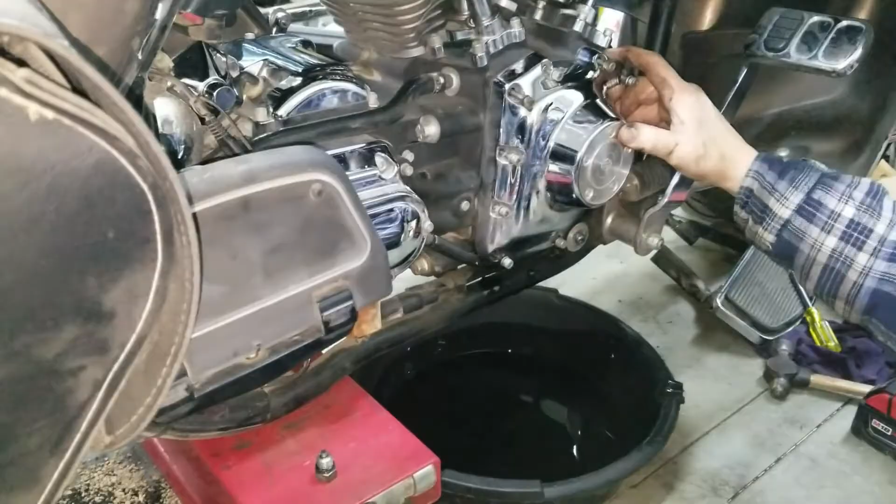We're going to be working on a 2004 Ultra, doing a Feuling cam plate upgrade in this segment. We got all the exhaust off, and he's getting ready to take the cam cover off here. It's going to start draining oil, and after this we'll be pulling the cam plate all apart.

We kind of missed this in the video with the 2007 and later model, but he's removing the push rods now. He's brought up the push rod tubes to hold them up so he can adjust them and back them all the way off, so they'll go up in there better, then take the tubes and stuff apart and pull them all out. We'll do that real quick here.

These are the quickies also. You got quickies also? Yeah, those are the quickies ones.

We got the new S&S lifters sitting in here soaking in oil, absorbing oil. We got air bubbles coming up every once in a while, you can see a couple there.

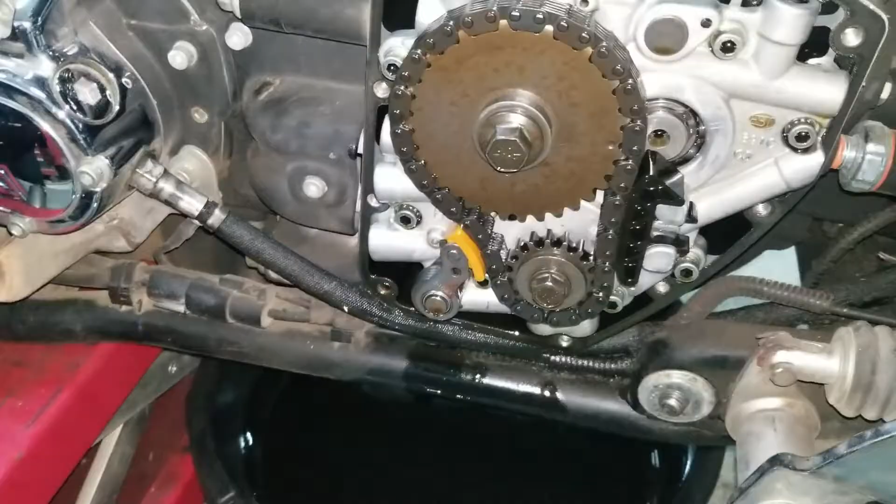Also, we got to flush the oil tank out in this bike. See, this style twin cam is the older one. These tensioners here, this plastic piece right here, they wear out about every 30,000 miles, and it's suggested that every 30,000 miles you switch them out with new ones.

So what we're going to do is flush out the oil tank, because the material that's been worn off - this is like the second or third time these have been switched out - this material's going somewhere. We're thinking it's in the bottom of the oil tank. It could be, so as a precaution we're going to flush this tank out, because it recommends to do that.

And the Feuling instructions, we're going to go put this on for this year model set. Like he said, it actually suggests and tells you to flush the oil tank out to clean out all that residue that's been building up for those years. So we're going to be doing that now, draining this out and letting it sit while we're working on everything else here in the background.

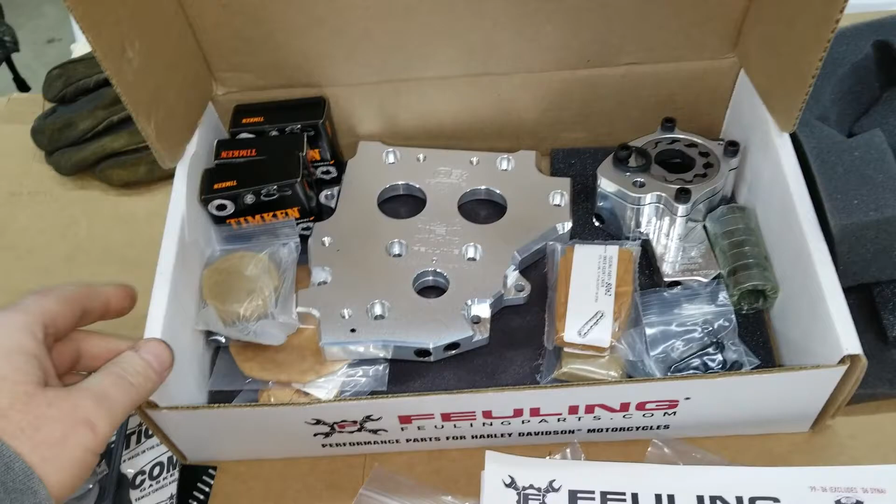It'll be draining out. The Feuling cam plate kit we're going to be installing, part number 7090. It comes with a bunch of stuff: a new cam plate, oil pump, all new bearings, a new sprocket, some chains, new screws, and lube for the prepping. It also comes with the plate for the back of the lock plate to help hold the bearings and stuff in for the plate, because this plate's different than the one in the 2007 and later that you might have seen in the other video I have out there.

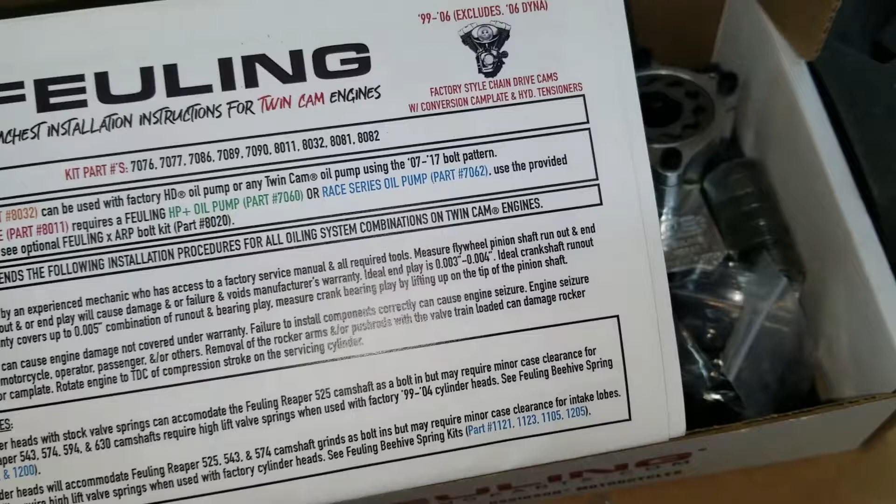It also comes with the hydraulic tensioner upgrade kit, so we're going to be going away from that spring style one that's stock. It comes with a set of gaskets for the whole thing. This is the OE Plus cam plate kit, and it's for 99 to 2006, but excludes the 2006 Dyna.

These are all twin cam engines, of course. So it's for the factory style chain drive cams with a conversion cam plate and hydraulic tensioners - that's what this is. Like I just said, this is the instructions, and we'll be going over all this.

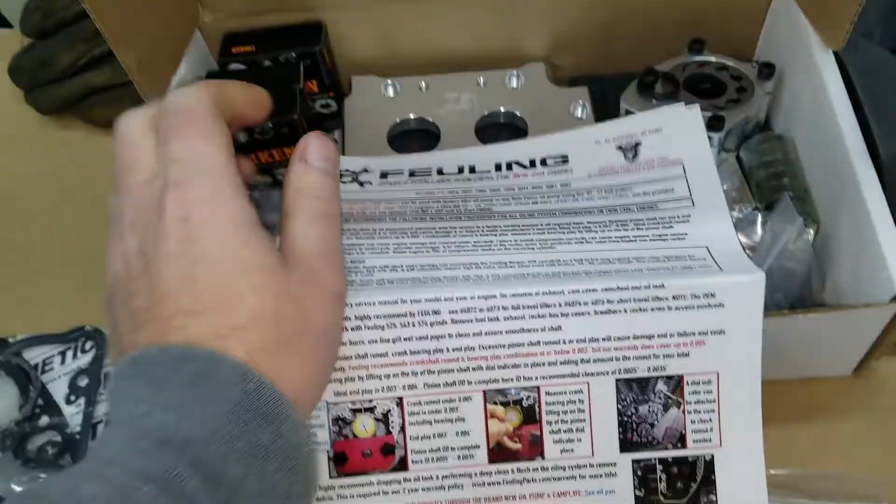So here we go. Right here we're taking tension off the tensioner and pinning it, so we can remove everything else. Dots up here - we just released that and got it pinned, and now we're backing these off and getting ready to take these out. This one's ready to come out when the timing dot is at the bottom, when they're facing each other. When this dot is up here, then the front one is ready to come out.

We're going to work on taking these all out, and then we'll probably go start taking these off later, because we're going to be replacing the lifters anyway, but that's later, putting them in and stuff.

There we are, we got the push rods out and the tops off here, and pull the lifters. We'll probably end up pulling the lifters here soon, and actually we can do that now. We have the push rods and all that stuff set aside in the order they came out, so we'll be able to put it back together easy.

We gotta take that pin out. There it is. So here we go. Then we'll be able to take the timing chain and sprockets all off, and then pull the cam plate off.

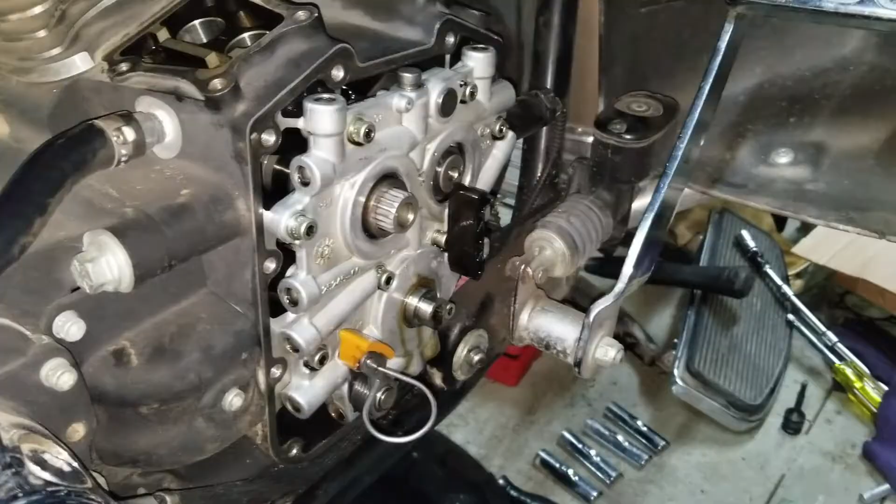There we are, now we have access to all the screws. There's a couple back here too, even. Then the oil pump - we're going to leave the oil pump on the plate, so all we're going to take off is the perimeter screws. Yeah, that's true, those are the oil pump screws.

Better release that. Guess what, that screw head - I don't want it to hit that and ruin anything. Oh yeah, I don't need it.

That should be it, yeah.

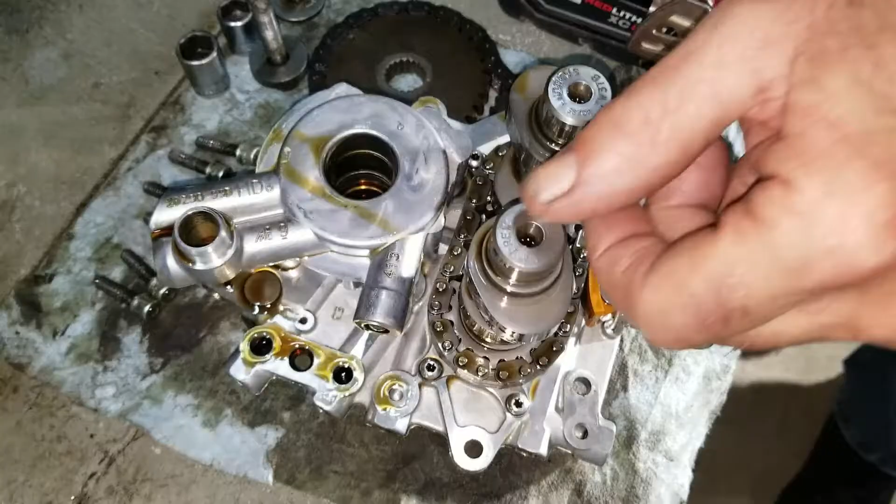All right, well here's the plate with the cams. We're going to have to remove this plate down here. And this tensioner was actually in pretty good shape - we just replaced it about 1,000 miles ago.

And these are Andrews cams, Andrews TW37B. All right, so we'll get that knocked out here quick, and then we're ready to start assembling, I think, possibly.

Removing the retaining rings. There we go.

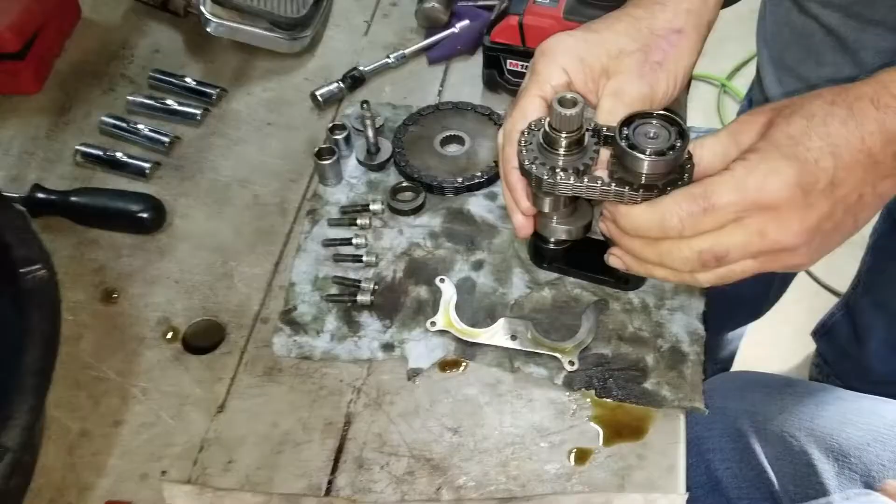Yeah, we're gonna have to tap on that first cam. I'll get a punch. Yeah, we got a new chain with the kit. Got the cams, we're gonna remove and take this out, take this off.

Now we're gonna pull the bearing off the cam. Oh, how you want to do this? I got a bearing puller.

If you watched the video on the 2007 and later, you can tell this is all different looking in here. These bearings are smaller - not quite as small as the bearing in the 99 and older Evolution motors, Shovelheads and Panheads, '58 to '99. The '58 roller bearing is just a little bit smaller diameter than this one here, and this is next size bigger. The '07s and later had a bigger bearing yet. Just wanted to point that out - we talked about it in the other video, so I thought I'd do it here too.

So while we're over here and this is all ready to go, we're gonna do the run-out test now to see where we're at with that.

So here we are - he's putting the plate on now, so we have a place to put our gauge mounted to.

Joe, your run out can be worse than mine. Really? Yeah, look at there - crank run out under 5, ideal is under 3. Well, there we go, play between 3 and 4. Oh, there we go then, I guess.

Why did mine have to be 2.5? Well, yours is better, I don't know. The year range changes that, I guess.

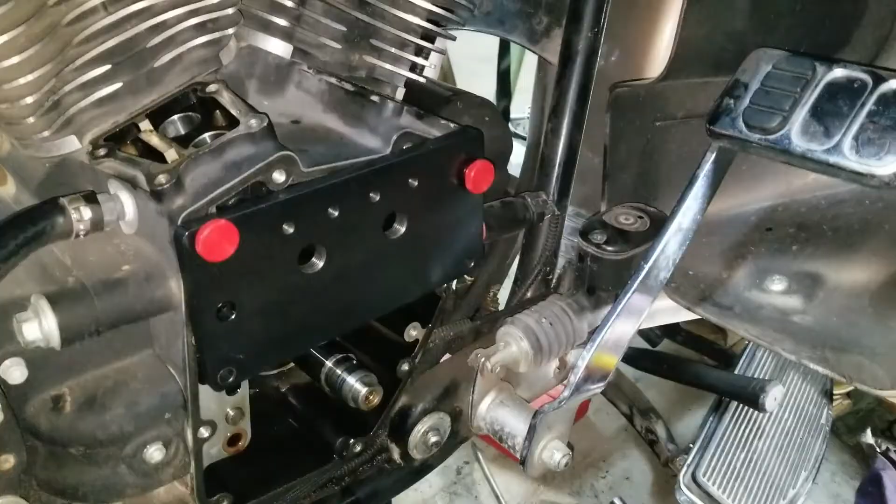I don't know, so what was it? 3 to 5. Says crank run out under 5 thousandths, ideal is under 3 thousandths. So that's what it should be.

So yeah, we're gonna be checking for any elliptical movement on the shaft here - high spots, low spots - and that would be an indication of the run out, the crankshaft halves being out of true.

We got the gauge all set up here, ready to check our run out, and he's gonna start spinning the rear wheel. It jumps up to 2 and it's back down to 0. Again, when it's on 0, tell me to stop. Keep going.

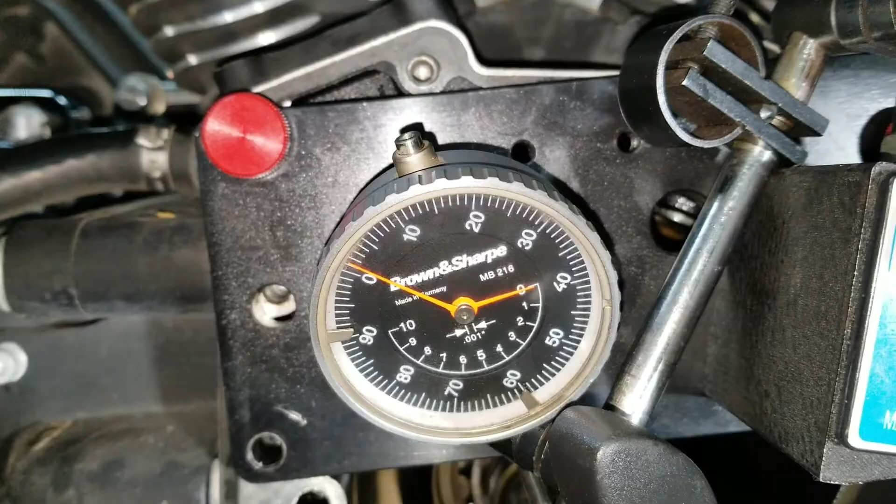There you go. Zero, okay. Now lift up on the crank, Joe. Pull up on it, watch the needle. Lift up as high as you can. Are you getting anything? Pull up and down. Half maybe.

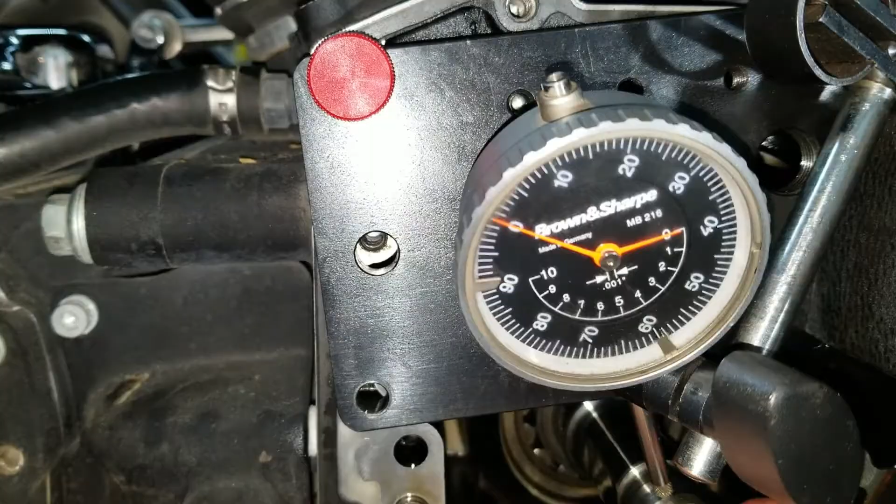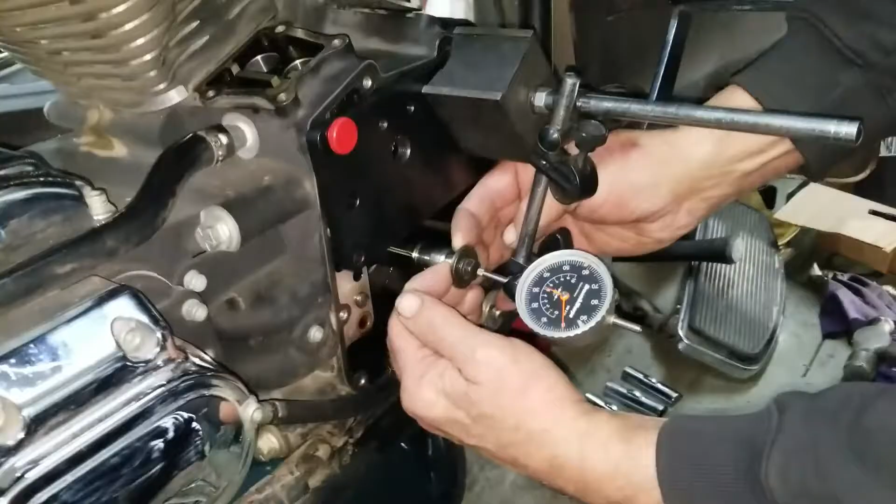Okay, now what we need to do is check end play. So in order to do that, we got to put the bolt in here, pull on it, and set this on the edge here. We'll set that up next. Alright, so we got this set up for checking our end play. We need to be between, what was it, 3 and 4 thousandths?

I can't get anything to move. I can't get it to move at all. I would think you'd have end play. Mine did, I could move it real easy. I can't feel any end play.

I guess, okay. We got it pulled way out. Okay, now we're going to push back. We got 3 thousandths. Okay, good.

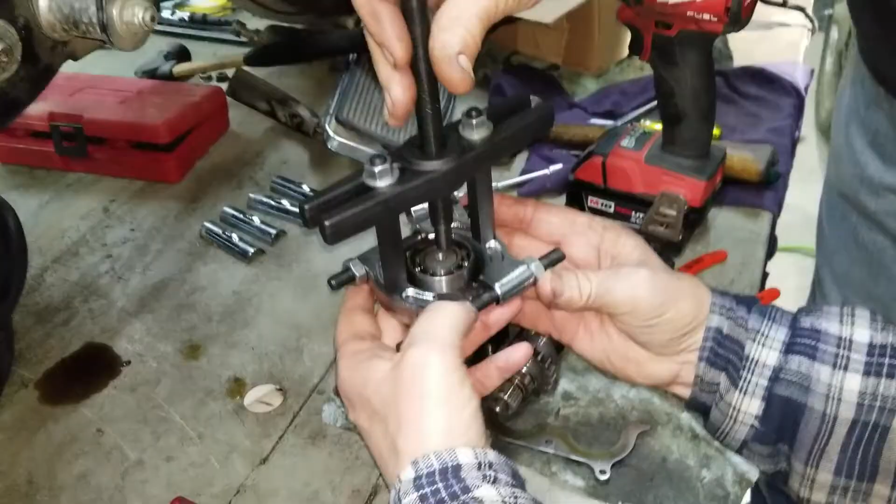Okay, now we need a wrench that fits that. Probably 5/8 or something. Got it here in the socket if you want that. One of these sizes fits it. Yeah, for this, or that. I don't care.

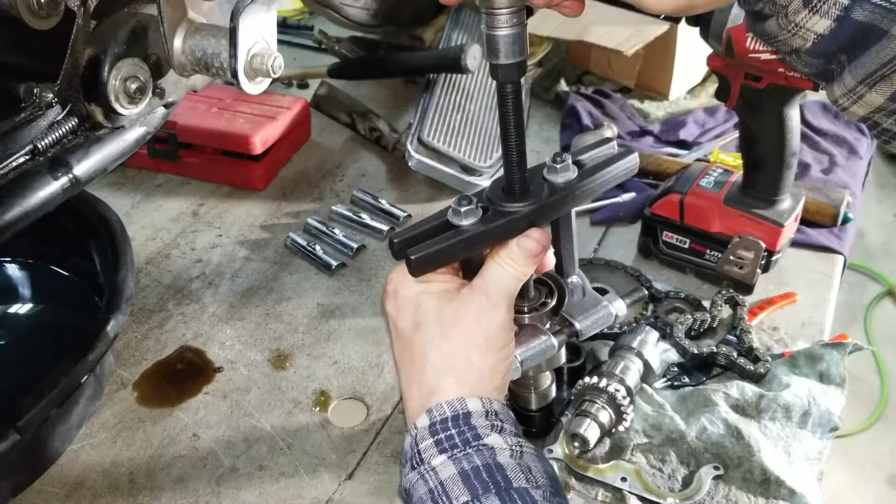You hold something, I just want to look and make sure we're not clamping too tight on that shaft. Well, we don't have to go all the way out. Let's loosen it up a little bit. Oh, somebody tightened it up already. There you go.

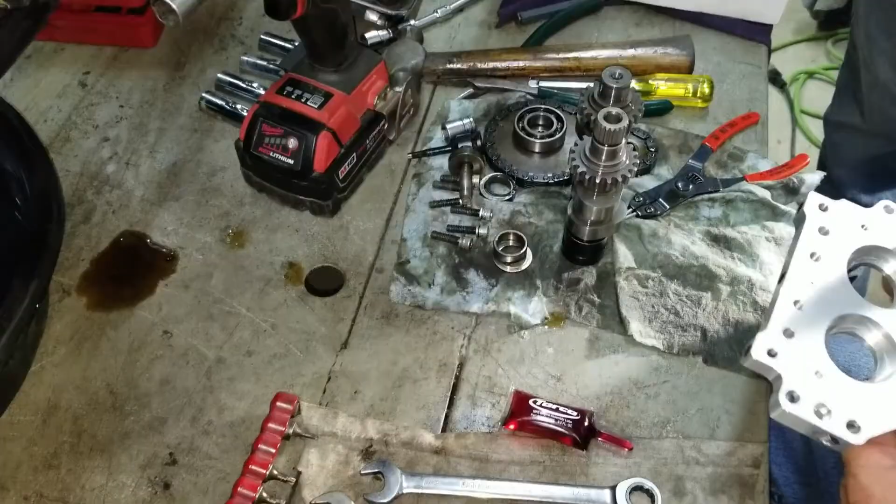Let's go, see? The camera, ta-da. Bearing removed. So with the bearings and the race removed from the cams, we're ready to start assembling stuff. One of the first steps is to put the bearings in the cam plate. We're working on getting this stuff ready right now. This is the ball.

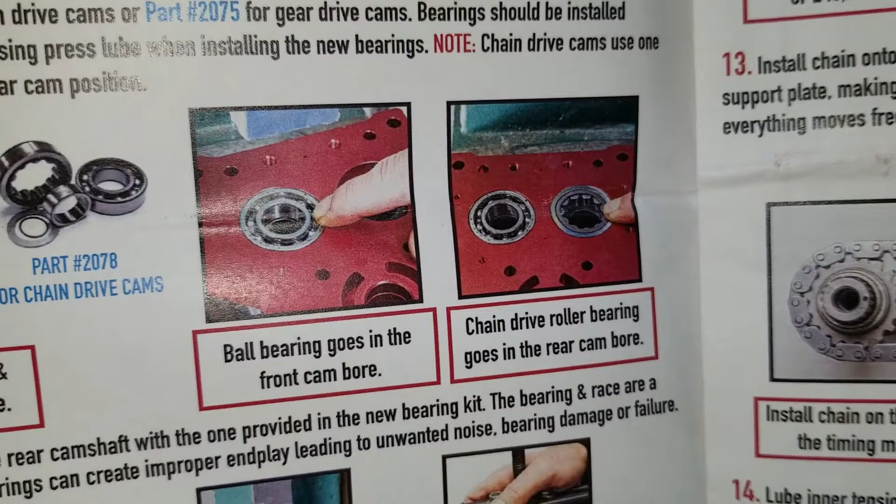We got the instructions here, and it talks about where the bearings go. The one with the race is on the right side with the plate backwards to open up, and the one with the ball's on the left there. It talks about on the one cam it gets an O-ring in there, and then a washer and a race. So we're going to be doing that here.

Alright, so this is the cam that gets the race. We got the O-ring in there right now, this is the old O-ring. This is the washer that goes between that and the race. So the O-ring and the race - it doesn't talk about a certain direction, so I was looking to see if it was a bevel. Doesn't look like it, so okay, that goes like that. Then we're going to press the race on it.

The race is inside the new bearing, and you're leaving the O-ring there just to help for now, or we can pop it off later. Anyway, he's getting ready to go press the bearing into the plate. Following the instructions, working on putting that in there.

Yeah, I gotta straighten that out. Alright, so we got the O-ring there we talked about a little bit ago, and then the new washer. Here's the race, and got a race installer here, homemade, and he's gonna go ahead and press that down on there now.

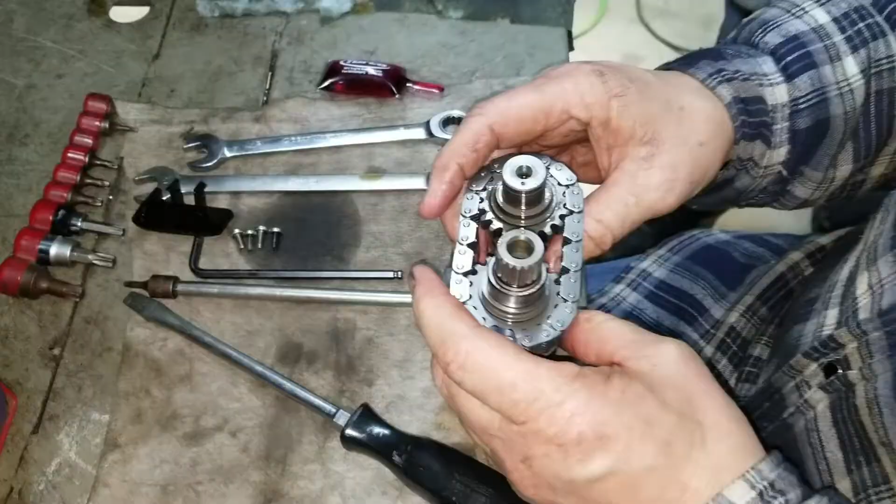Working on getting the alignment here on the cams, tooth to tooth, there it is. So dot to dot. Now you can bring that other plate over. Here's the press, here's this one, there you go.

Now we got to press that on. Yes, and that is that other tool. I think it's on the press yet. Yep, okay. I'm sure that this one is lined up.

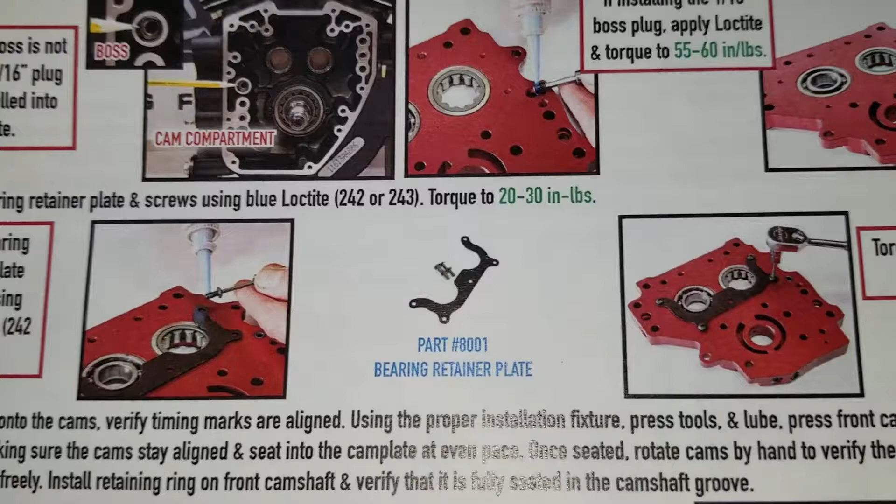We're getting ready to put this bearing retainer plate in. The instructions say you should do it after or before you press the cams in, but it doesn't matter as long as you can still slide it up underneath, as long as that oil pump's not in the way. Also, it comes with new screws, new plate. We're putting the new plate in, and the screws are torqued to 20 to 30 inch-pounds.

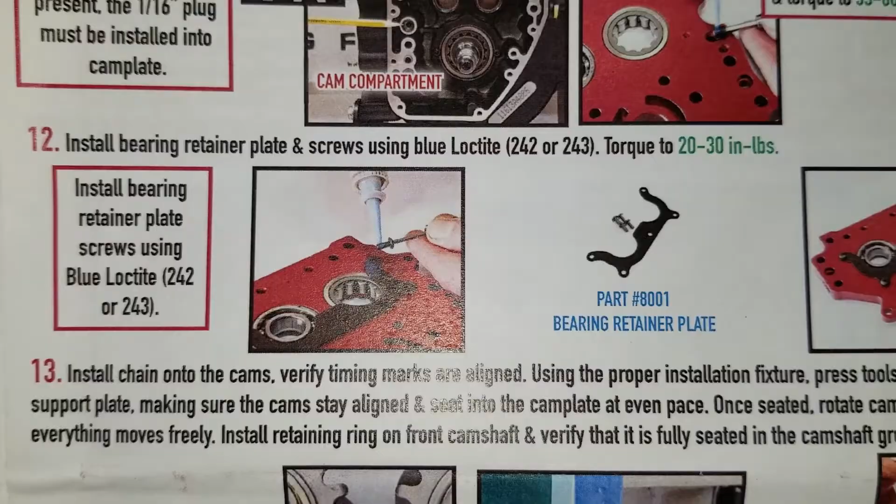Applying red Loctite to it, it says too - or no, it says install bearing retainer plate screws using blue Loctite 242 or 243, which they didn't provide. That's why I thought we were going to use red. So we're going to put blue Loctite on those screws, and 20 to 30 inch-pounds.

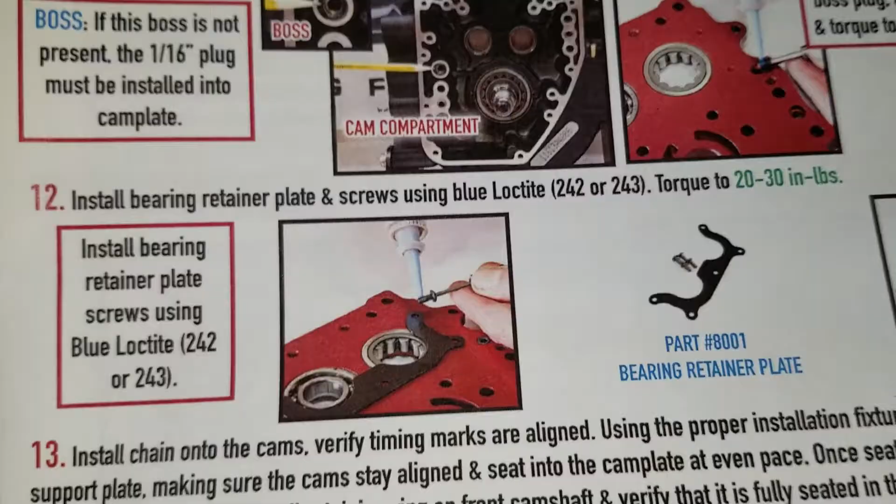There we are, we're going to torque these down real quick. While they're finishing up that bearing retainer plate, we're gonna make sure we install this boss plug here. It goes into the plate right here in this top corner.

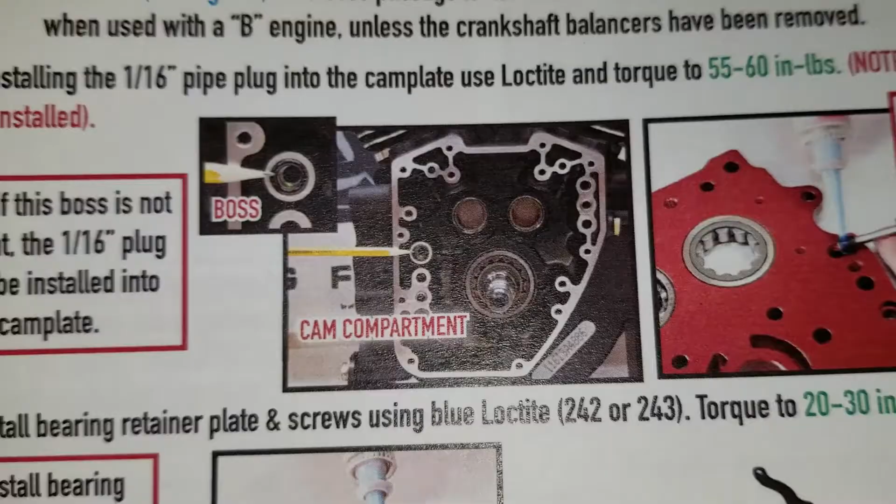What it's talking about here is if the boss is not present, the 1/16th plug must be installed to the cam plate. If it is there, you don't need the plug.

So it says I'll put it in anyway. Touring: if the boss is not present in a 99 to 2000, the plug in your cam plate must be installed. If the boss is present, it is not required to install the cam plate plug, as the boss is a dead hole. However, Feuling recommends installing the plug in all A engines to prevent any potential oil leaks at the boss.

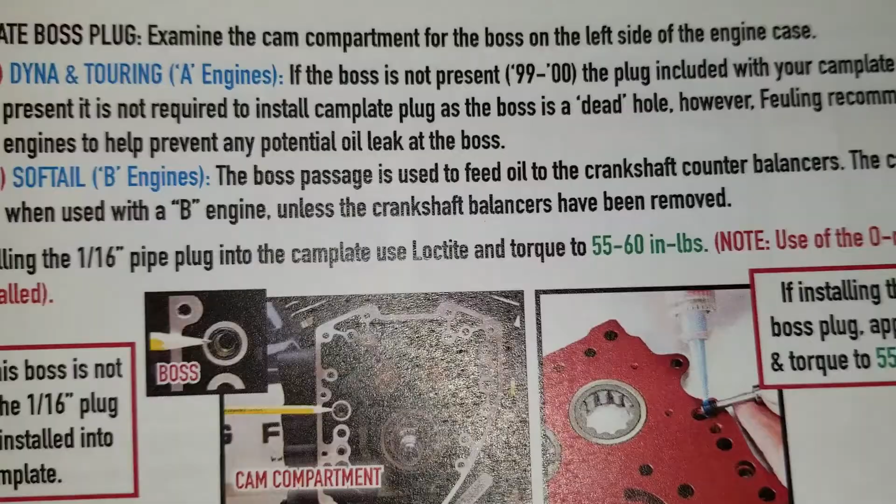B would be a softail engine. So A is this touring engine. So we're putting that plug in right now.

That gets Loctite and 55 to 60 inch-pounds. So they got that installed right there. And that's the boss plug. The boss that they're talking about is this hole here.

Alright, okay, them cam bearings there. The original style in this style motor had a plastic retainer in there that held the rollers together. This one has metal with a brass or something retainer in there, right? But it's still a lot less rollers.

So then there's another one that's come out now, and then this is the one that comes with the kit - they're all rollers inside of it. So we're gonna be installing these. This is a lot better.

She's working on putting the bearing remover in right now, and it's gonna pull these out. We'll come back and talk about this a little bit more, but you just pop this special tool in there and it grabs it and pulls it right out through.

Alright, so it's got the tool all set up. This spreads out the flanged areas here. You gotta make sure that's in there. And once you start this, you gotta commit to it, because there's no getting it back out, because it goes behind and grabs on the back side of that bearing.

And right there in the back here, that's the flywheel. So you don't want any of this stuff going inside the motor. There's the bearing, one of the cam bearings just removed.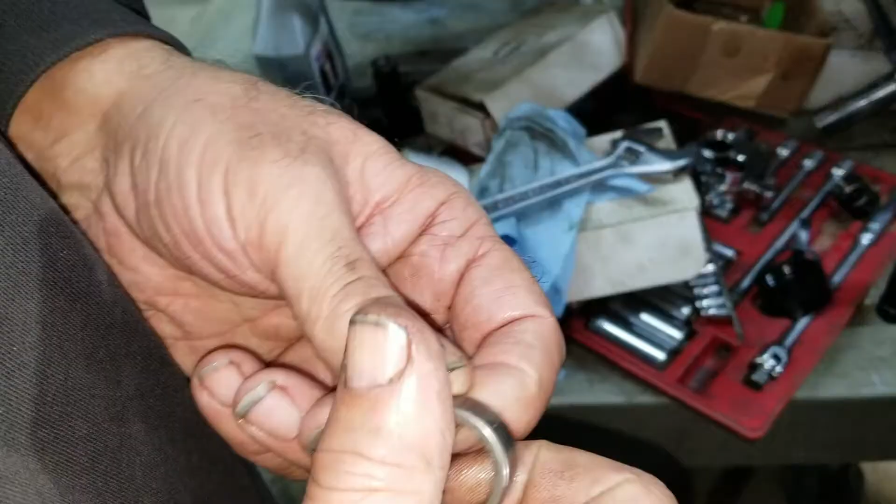Numbers are on the outside, if I'm correct. Yeah, is that how that one is? There, we got the bearings removed. We're ready to put the new ones in.

Here's the plate, we'll be installing that to the engine case with these thumb screws. And then there's a special driver and threaded piece here that pushes it in. You gotta put the bearing on that too, don't you?

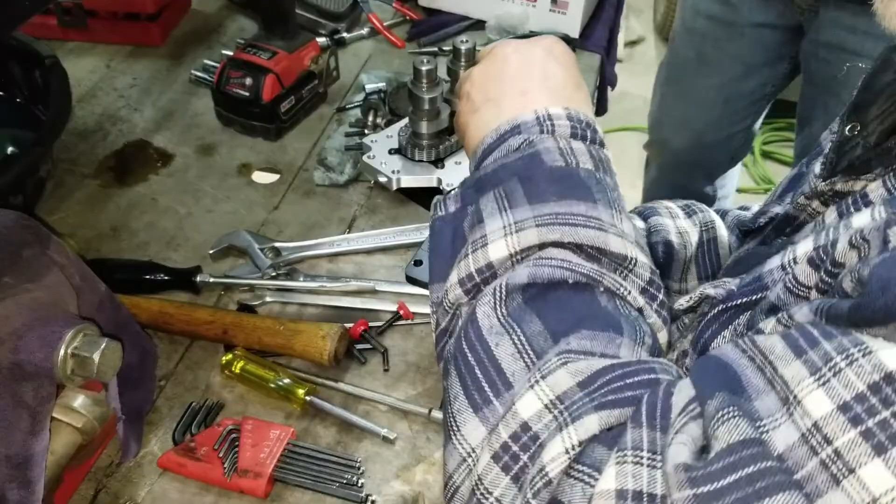Okay, words out, numbers out, yes. That's numbers. You want to put some molly on it? Yep.

Or we do it after it's in there, I don't know. So with the old bearings out, they had a lot less rollers in there with that retainer thing sitting there. So that was one of the other reasons they upgraded to this - we're upgrading to this bearing. That's probably twice as many, probably close to it. That's gritty, it's got anti-seize on it.

Where's your cutter, you ain't got it out yet, do you? Both bearings in there now, and this little piece holds the bearing, puts it in. There we go, now we're ready to move on to the next step.

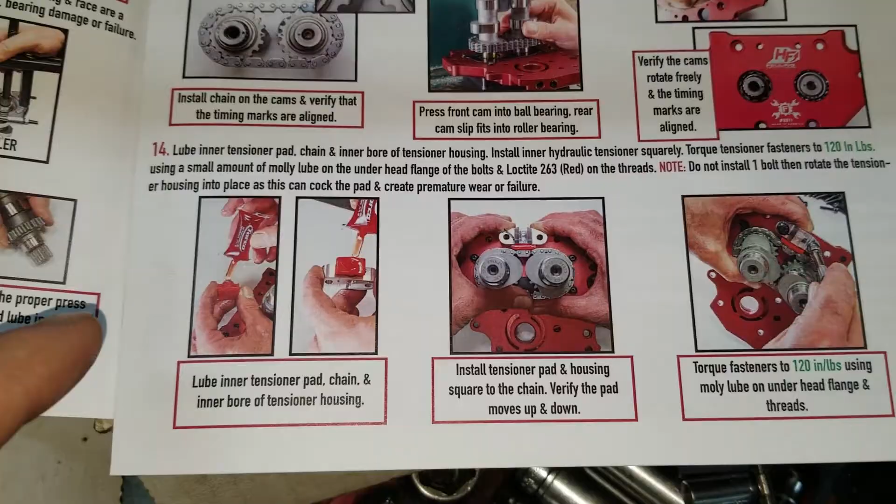Okay, so next here in the instructions is to lube the inner tensioner pad, chain, and inner bore of tensioner housing, and then we install the tensioner. So I'll be doing that next.

Lubing the chain right now with the red assembly lube that came with the kit. And you want to put some on the outside so you give a... oh, lubing the inside, I don't know.

There, you can start lubing the tensioner stuff. And this has got to go on. Yeah, we're going to have to push. And we can't put it in one screw and then tilt it, you got to push it in straight.

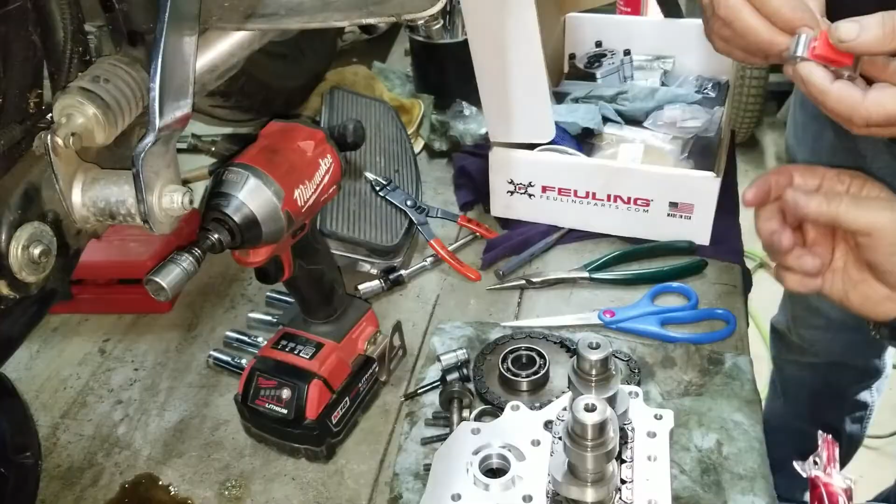Did you get it lubed already? That's on it, it's got... you're supposed to lube the inner tensioner pad, chain, and inner bore of the tensioner housing. Oh yeah, pull it apart. Okay, that's good.

All right, it says here to torque the fasteners to 120 inch-pounds using the Moly lube on the underhead of the flange and threads. Oh, that's right, they do Loctite any of this stuff.

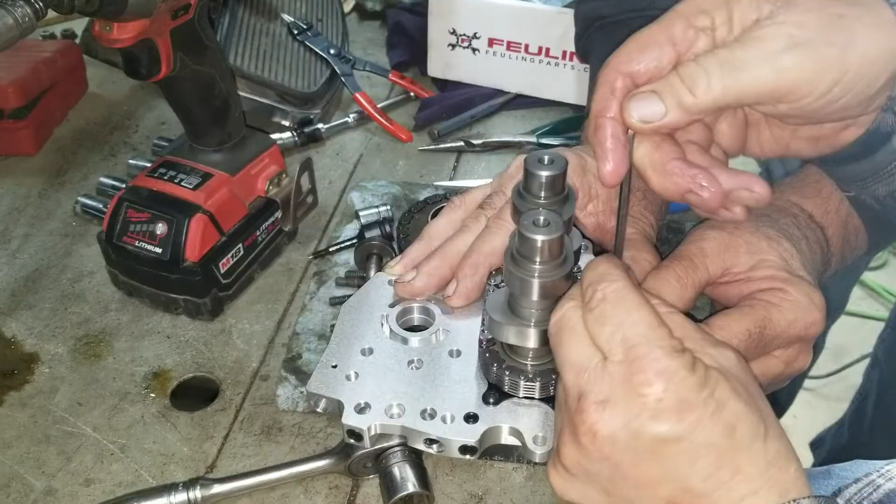Well, he's about dropped it. I get it lined up pretty good. Nope. Should be there. Bring it this way, touch. There we go, don't move. Okay, start the other one. There it goes, hold there forever until I get it. Yeah, I know.

Hold it there forever. Right there, we get ready to torque this down to 120 inch-pounds. When you get halfway there, you know, you can go to the bathroom.

So the next step here, they're talking about disassembling the oil pump and then lubing it all with the red lube that comes with it, and then putting it all together, and priming the oil pump with clean, fresh oil before attaching it to the cam plate. They're pouring oil right to the middle there, so we'll be doing that here coming up.

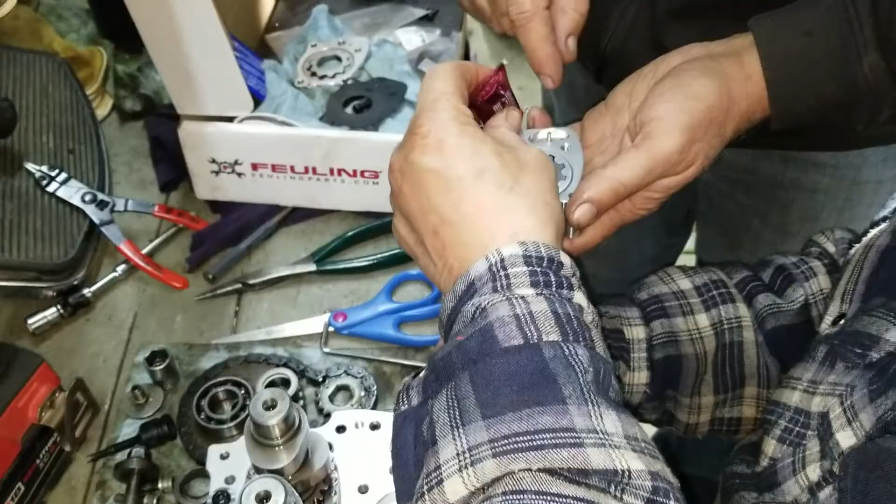Yeah, yeah, you can pull it all off there. Give me that. Okay. There you go, now you can put some down in there and then on the wall. Just the way I picked her up, just like that there. There you go. Ooh, yeah, get it all over me. Good.

There you go. This one don't have an O-ring, huh? Got it? Yep, and this. Let me have this up here. Get her in the hole anyway. Alignment pins, yep, yeah.

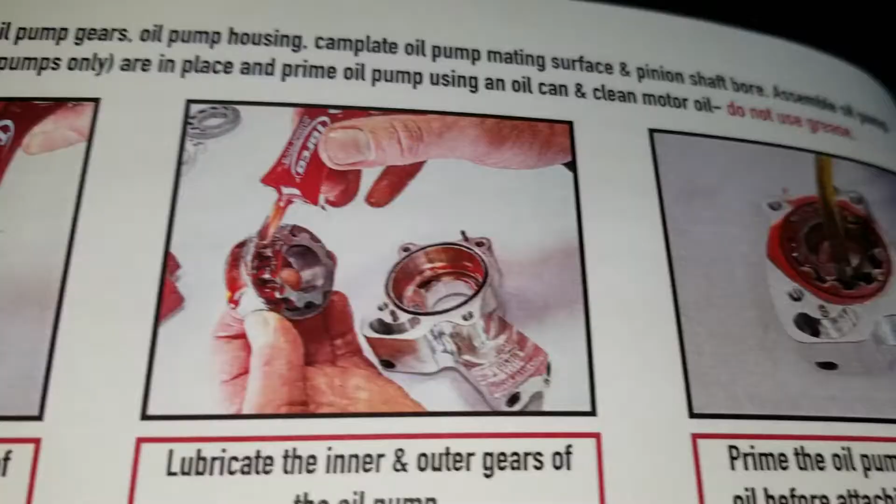Does it show an O-ring? It does on this one, but it might be for a different model or something. Yeah, mine had an O-ring. Yeah, and the O-ring in the pictures he's talking about, that one there, but this one here doesn't have that picture or provision for it to be on there. So evidently I don't use it. I didn't see it in the group of parts, did you, in the box? No, it's not there. Unless it's somewhere else, like in that bag of gaskets.

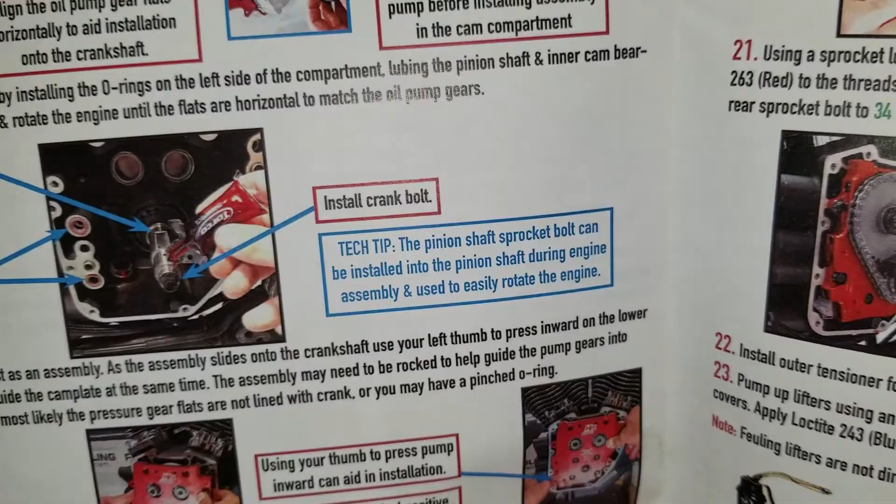Step 17 here is lining up the oil pump pieces. There's two pieces that rotate in there that are D-shaped, and they've got to be in perfect line with each other, that's what they're doing here. You're going to rotate the crankshaft until the flats are horizontal, and then you can install the cam plate O-ring cases, put the O-rings in, and install the crank bolt, sliding it through there. It says here, tech tip: the pinion shaft sprocket bolt can be installed into the pinion shaft during engine assembly, and used to easily rotate the engine just with a tool.

So then we install the cam plate coming up. All right, so we have the oil pump aligned right now in there, and we're putting these new O-rings in here. He's just pre-lubing some more stuff there, and we're ready to put the plate in with the cams. So we're getting ready to attach the oil pump to the plate, and it's got the new oil O-ring installed right there also. Here's mine, it's already mine.

All right, he's gonna work on putting them in the rest of the way, and then we'll come back. I just need a taste. That's good. A little more on the chain, yeah. All right, ready?

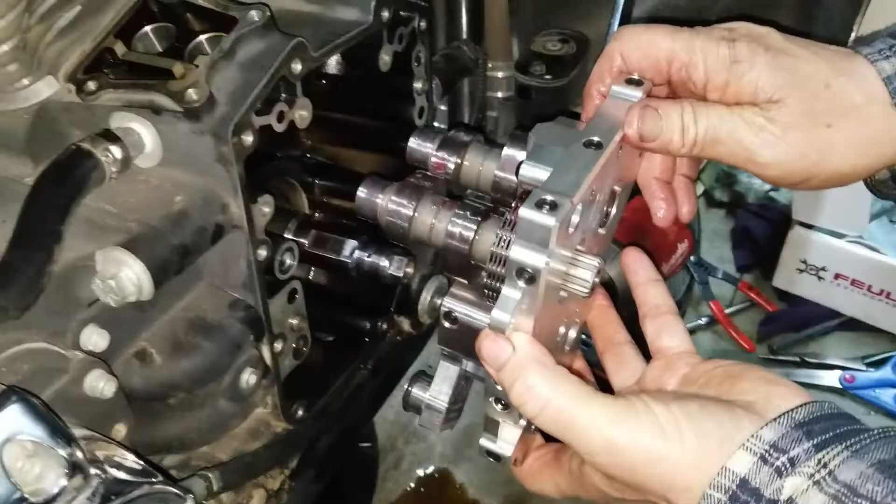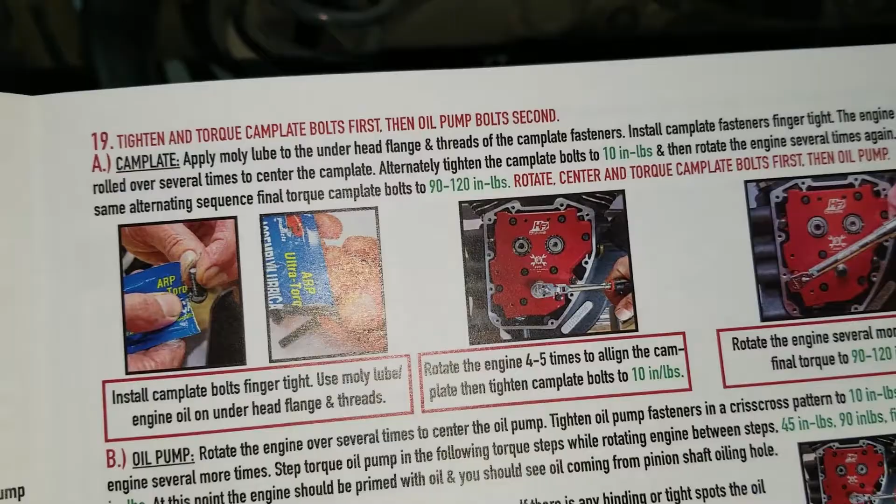All right, so we got the plate installed, and it tells you to run the screws in a little bit, and then you've got to align the pump. So on step 19 it says tighten and torque cam plate bolts first, then the oil pump bolts second. On the cam plate, apply Moly lube to the under head flange and threads of the cam plate fasteners. Install fasteners finger tight, and the engine should be rolled over several times to center the cam plate. Alternately torque the cam plate bolts to 10 inch-pounds, then rotate the engine several times again using the same alternating sequence. Final torque cam plate bolts to 90 to 120 inch-pounds. Rotate and center the cam plate bolts first, and then the oil pump.

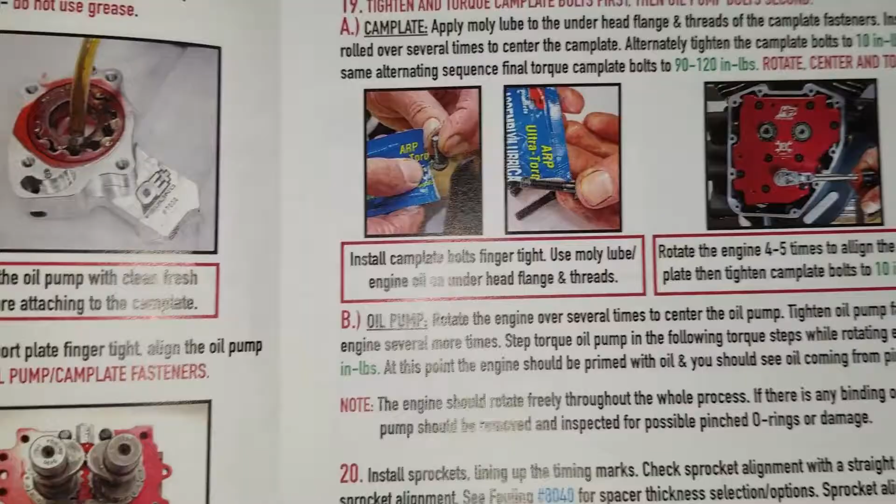Oil pump - rotate the engine over several times. Tighten the pump down to 10 inch-pounds, then rotate the engine several more times. Step torque the oil pump through the following torque steps while rotating the engine between steps: 45, 90, and then final torque of 120.

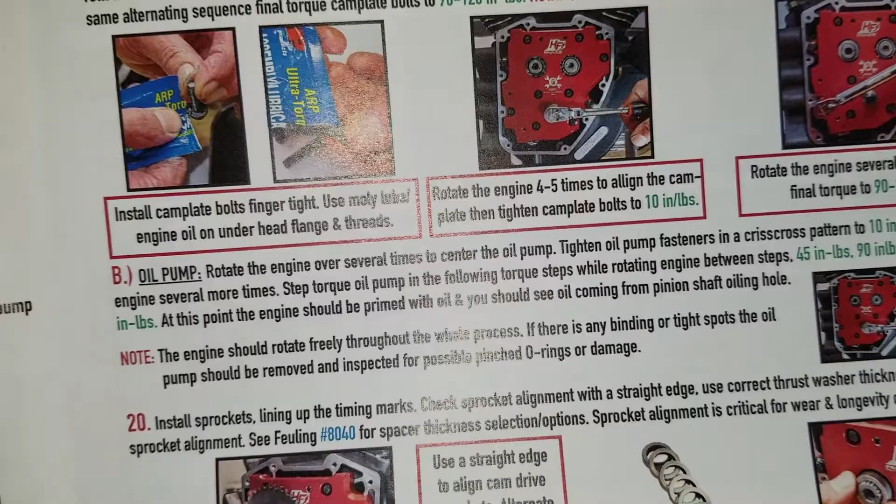When this is all done, the engine should rotate freely. If there's any binding or tight spots, the oil pump should be removed and inspected for a possible pinched O-ring or damage. Just got done installing the retaining ring, snap ring on that front cam.

Then we're going to put the perimeter bolts in the cam plate and start the sequence of tightening them down. We're putting the moly lube on the screws and putting the screws into the cam plate now - some sort of ARP grease, ARP fastener assembly lubricant.

So yeah, we gotta put them all in finger tight right now. Then the next step would be to roll the engine over several times, and then start the torque sequence. That'll eliminate any binding and stuff.

That one. Oh, I got it all over me. Oh, at least it's not silver anti-seize. 1, 2, 3, 4.

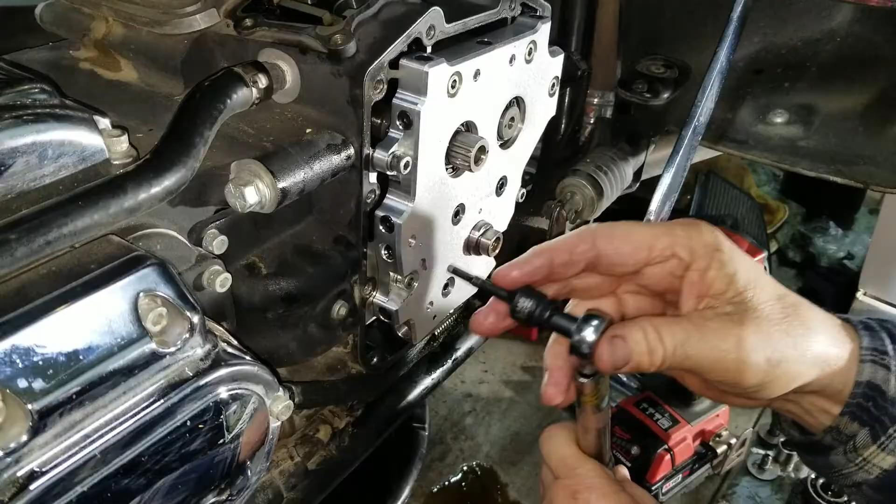Alright, it says to rotate it some more. Okay, ready? Yeah. Three, 4. So the next increment's like 45.

45. While we're rolling this over, we should probably put oil in it so that way the pump can be sucking. So, yeah, go ahead. It looks like we're going to torque this down to 45-50 right now. Then we'll rotate it again.

I don't think I did this one. Okay, now I'm going to go all the way around so I don't miss any.

Yep, since we have the oil drain, we're going to put oil in now. So next setting would be 90, it says. 90. Then after that, it'll be 120.

3 and 4. So yeah, this setting is now 90 inch-pounds. We gotta do it one more time, and then we'd set it for the final torque at 120.

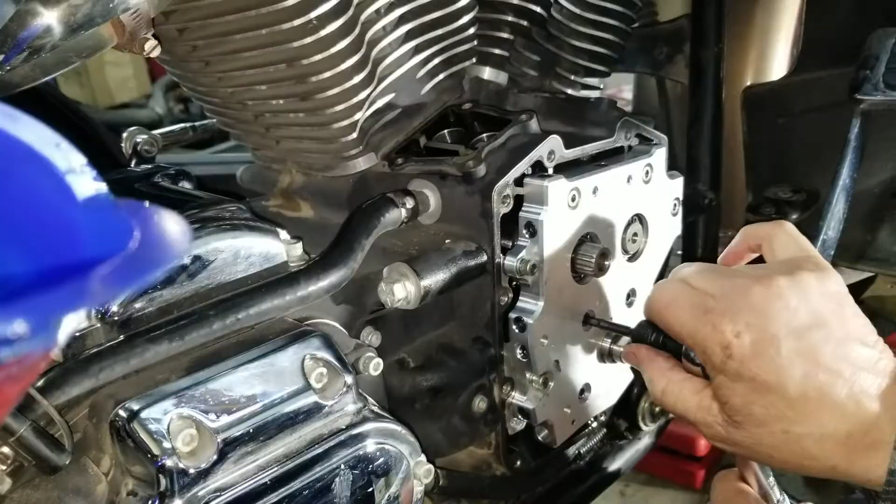Because this is actually when you rotate it and he's torquing it down. It says here that your oil pump is priming at this time, and you should see oil coming out of the pinion shaft hole.

Oh, good thing we put oil in the tank. Yep, so now go ahead and rotate it.

Okay, let's set it for 45 inch-pounds. 4. Oh, it's starting. How many? That's fine, that's fine. Several - we got movement here. Oil, look at there, we got new oil already. It's not new oil though.

Okay, so we gotta go where? 45. Yeah, 45. Okay, and then several more times. This time we'll be going to 90 inch-pounds. 2, 3, 4.

All right, rotate some more. Yeah, here, what's the next setting? 120. 4, 5. That'll do it.

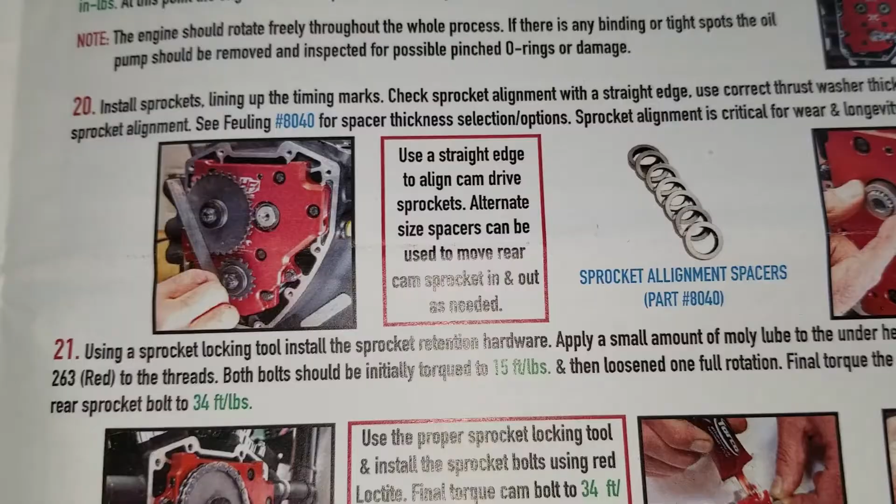For the next part, we're installing sprockets. We're lining up the timing marks and checking sprocket alignment with a straight edge, using the correct thrust washer thickness to achieve proper sprocket alignment. There's a bunch of spacers that came with this kit, so we're working on that now. He's got the sprockets installed - these are the ones that came with the kit. They're thinner than the original stock Harley ones because we're putting on a different chain, and because of the hydraulic tensioner, they were called for different.

Okay. Roll the back wheel over. It's right there.

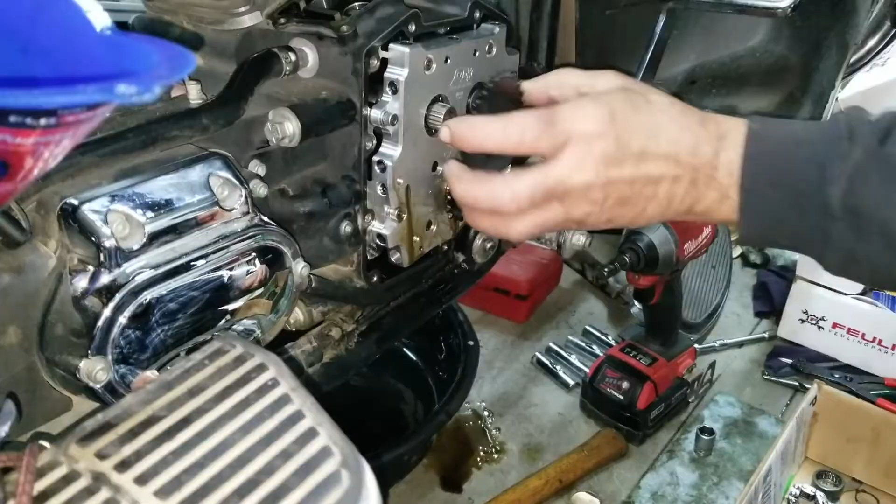So here's how we're checking alignment with the ruler. It's hitting down there, so let's get it flush with it. We need a thicker spacer than this. And the original one that was on - let me get the calculator - yeah, that was the original one.

That's it. So we're feeling that it was flush, when it's straight across, not at an angle, and not leaving a gap.

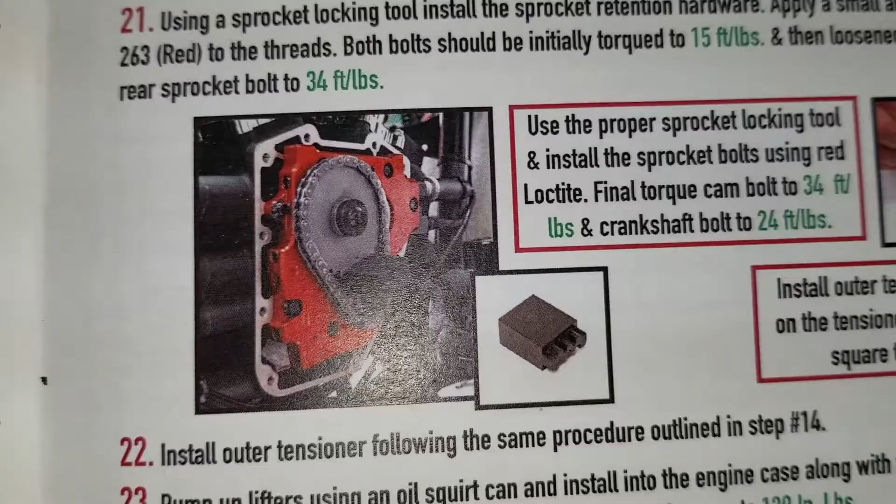So step 21 talks about installing the chain, and we have to put it on as a group - both dots need to be across from each other. They do. Then use the proper sprocket locking tool and install the bolts using red Loctite.

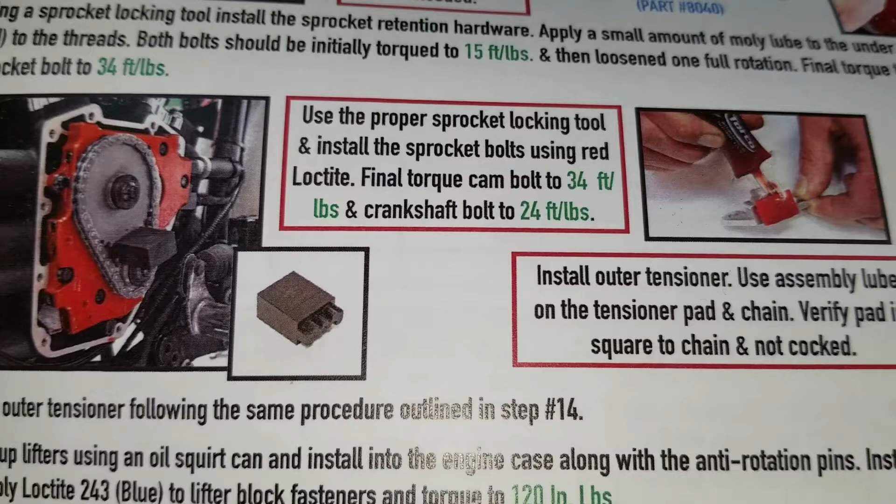Final torque on the cam bolt is 34 foot-pounds, crankshaft bolt at 24 foot-pounds. We don't have that tool here, but we need to make sure those dots are lined up with each other.

So there we are, we got the alignment right. That's how it lines up - dot to dot, okay, lined up.

Next up, we install the outer tensioner using assembly lube on the tensioner pad and chain. Verify the pad is square to the chain and not cocked. Right.

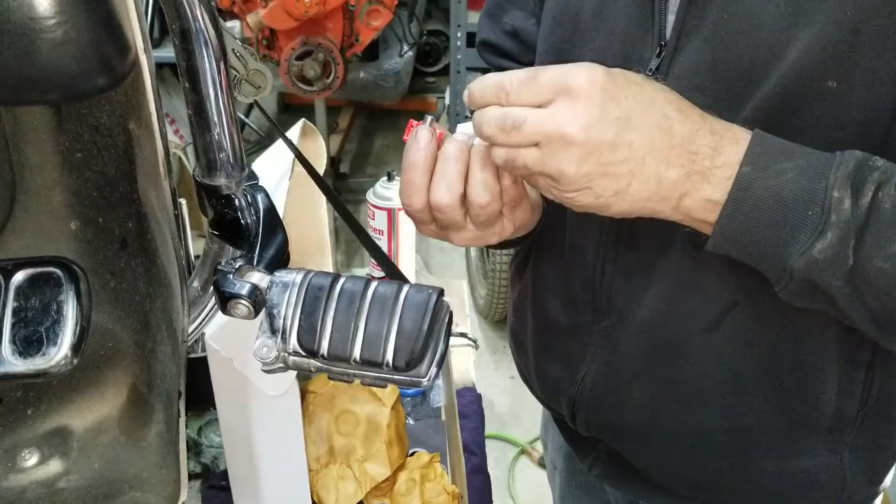We'll want to lube the inside of that as well, like we did the other one. Only one side of this has a hole in it, so you have to line it up with the hole. There it is - I got some lube on that. Moly those.

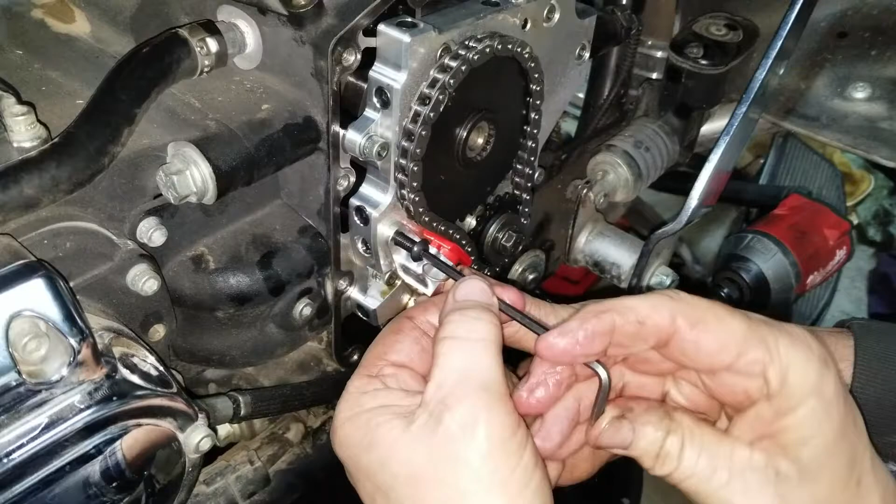Okay, are we ready? Top one first - I think I'm pretty close. Just start it, and then - okay, now we're gonna push - no, that's good. Got it? Now run it again.

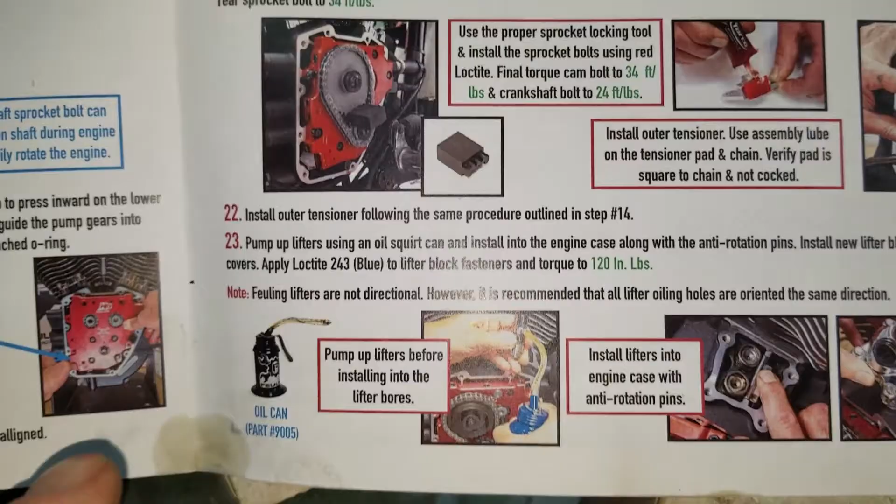Number 22 just says installing this tensioner is the same procedure as the other one, which we just did. Now pump it up. We got new bolts for those.

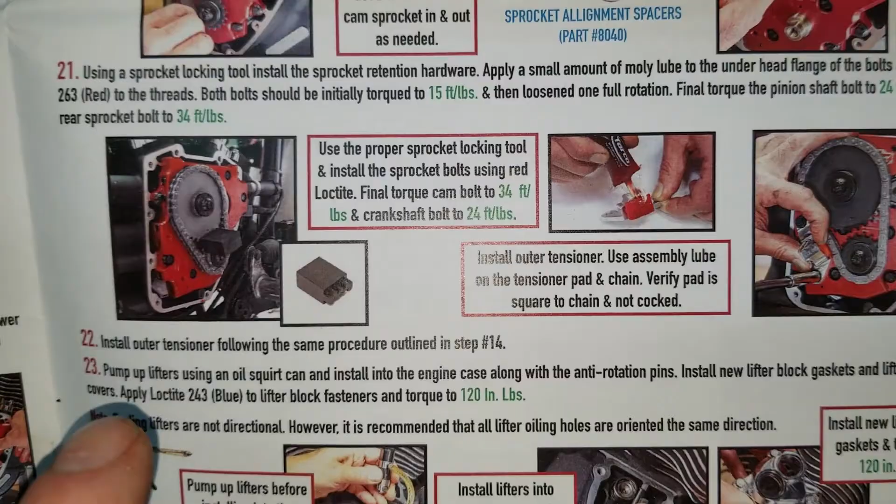It says here, pump up the lifters using oil, which we already did - you saw that at the beginning. Then we're ready to install them. It says pump up the lifters using an oil squirt can and install into the engine case along with the anti-rotation pins. Install new lifter block gaskets and lifter block covers, apply Loctite to the block fastener, and torque to 120 inch-pounds.

Right now we're putting the crankshaft bolt in, and we'll do the cam one. The crankshaft bolt uses red Loctite at 24 foot-pounds, and the camshaft one is red Loctite at 34 foot-pounds. That's probably because it's bigger - yeah, it is bigger, this is a 5/16 and this is a 3/8.

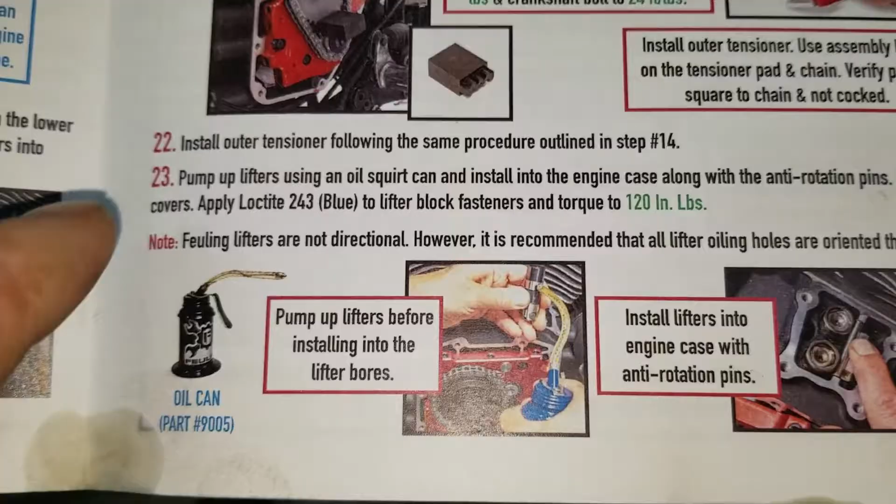This part 23 talks about the oil pump and squirt can stuff, but we don't need to worry about that since we had the new lifters soaking in oil pretty much the entire process we've been doing here. So our next step is putting these in along with the anti-rotation pins, a new gasket, and then our blocks get put back on.

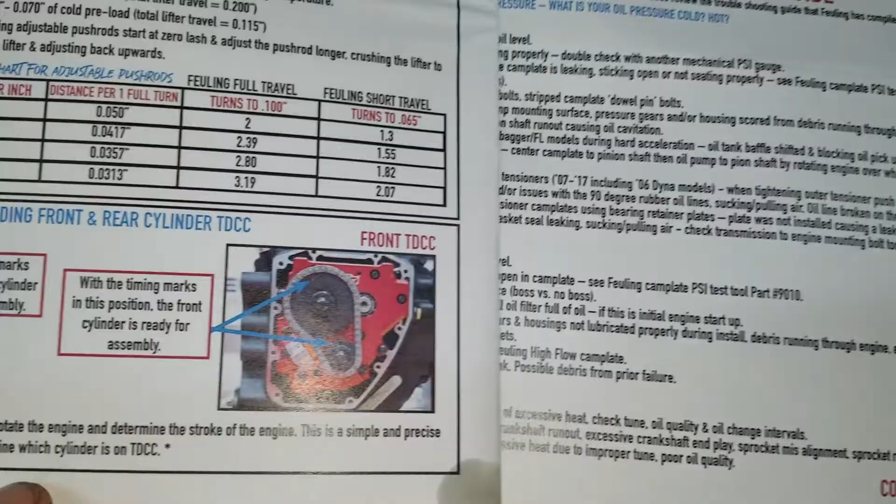Got the gaskets here - what do you want? Getting ready to put these lifters in, and there's an oiling hole on them, only on one side. They go holes in or holes out - we're putting holes out, and they both have to go the same direction, all facing the same way. Then you put a pin in.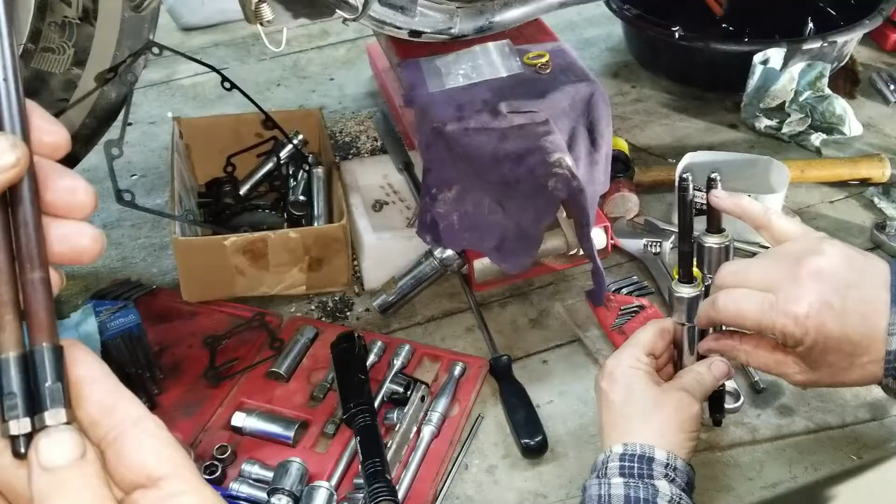So it's installing the rear lifter block cover right now, and we'll move on to the front one. Is this the point right here? See, there's a lug, there to there - this one's about a quarter inch. So the short one goes first. Here you go - the short one goes first? Yeah, it's on the inside.

Alright, so with the timing marks lined up like we were supposed to according to instructions, we can start doing our timing, or putting our push rods in. Got the rear one in here so far. Right now we're ready on the back cylinder. We're going to adjust this one. You got, it's just zero clearance right now. So to adjust that one, you have to have the marks there. This cylinder, then we turn this mark up here, and then this cylinder's ready.

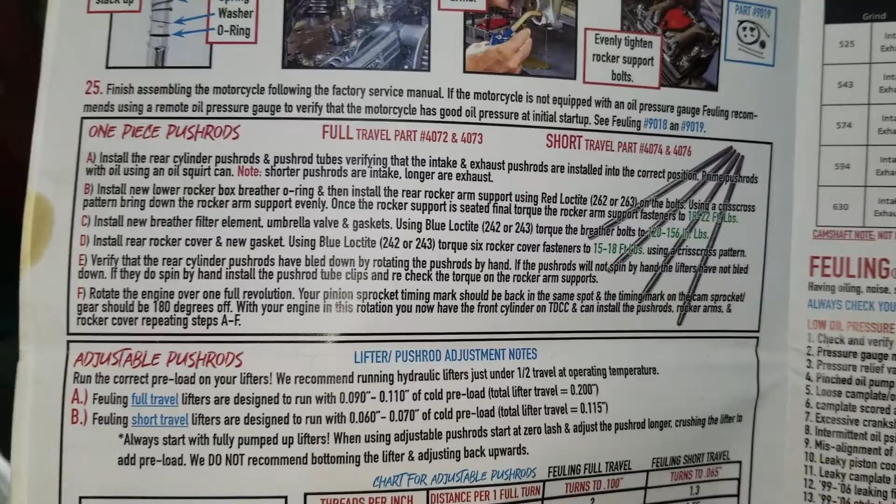So with doing the push rods, putting them back in, one-piece push rods are kind of a pain. You got to take the whole top end apart to put the push rods in, and there's a segment talking about that if you're into the solid ones. But typically people would just, to save all the labor and time, cut the push rods and pull them out and put adjustables in.

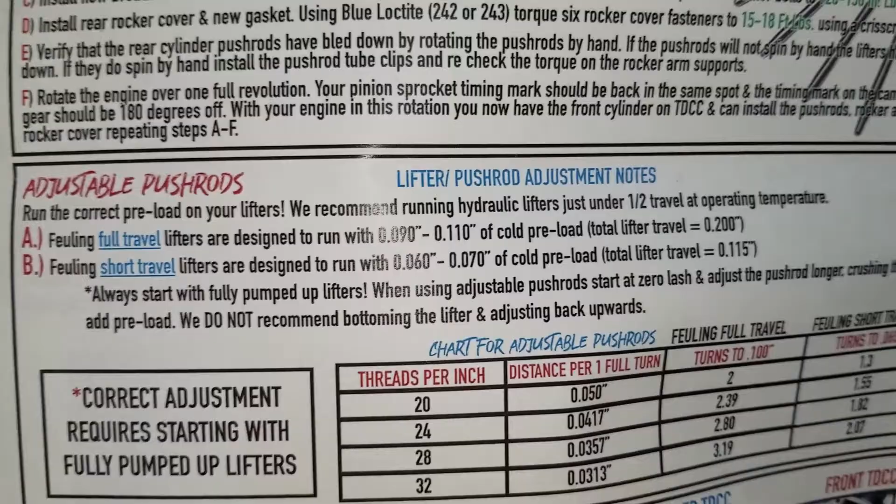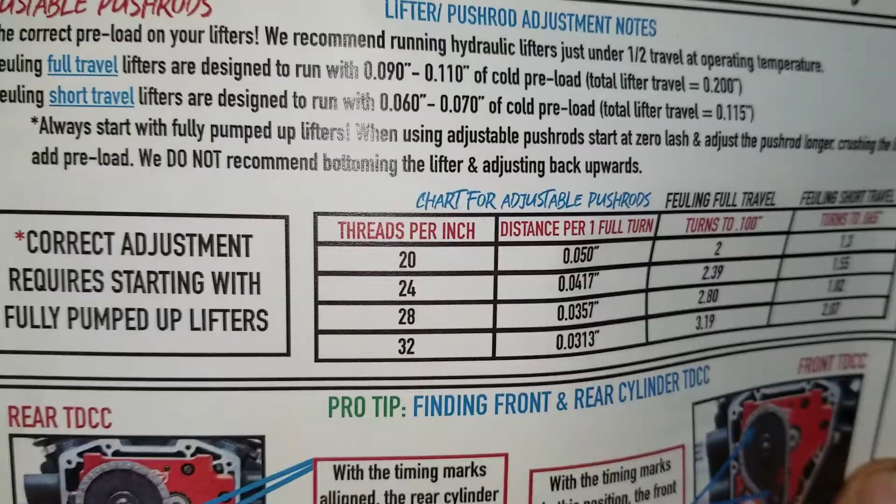With doing adjustable push rods, you got to run the correct preload on your lifters. They recommend hydraulic lifters with just under half travel at operating temperatures. Feuling full travel lifters are designed to run with 0.090 and 0.110 pre-cold preload, total lifter travel 0.200. These are S&S lifters, and he's got Quickees for his push rod adjusters, that's 32 threads per inch. To get that, you got to go over to 3.19 on this as well, because on the 2010 we worked on in the other video, it was the same setup.

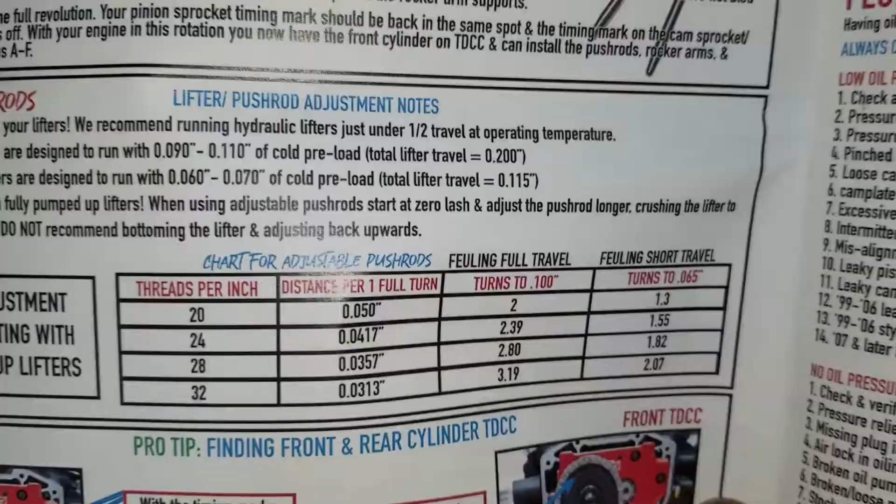Right, we'll lock that nut down, and then the rear cylinder is adjusted, and we'll be able to rotate it till the timing mark is at this top corner down here. It'll be up here on the front cylinder. So right now, see, because if we did this now and rolled it over, you'd bend a valve on a piston. So we got to wait for this to loosen up, could take about 4 or 5 minutes.

Bleed down, so like he was just saying, the rear one there is bled down, it'll rotate, and this one here is still solid, so then we'll be able to rotate it. We'll finish up the rear one now, and we got that rotated to the top, timing marks at the top. Rods are on the front one now. We got the push rods all done.

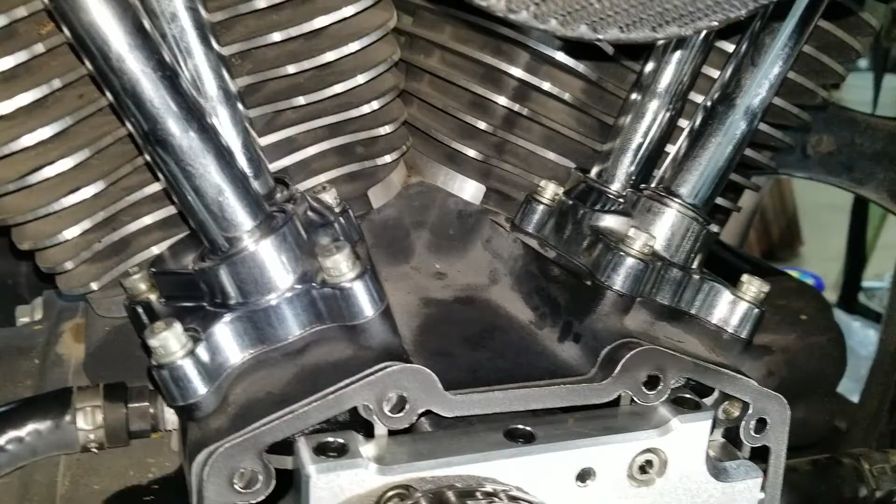It was kind of boring watching all that adjustment stuff, so if you've ever worked on Harleys before, you've seen all that before. If not, it's straightforward when you're reading the instructions on this kit. And then we got the gasket sitting here ready to go on, new one, and then we're just going to put the outer cover on here. Button it up, we're pretty much almost done here.

Then we'll probably knock out all the boring stuff like putting exhaust and stuff back on, and then we'll come back and see how it runs, see what kind of oil pressure we have for this one. Everything's kind of installed, we got the exhaust and everything installed here, and we're gonna just circulate the oil and see how fast the oil pressure light goes off.

The pump came up a little bit too. Pump went up to 20. There we go. Now I guess the next step is put the plugs in and fire it up.

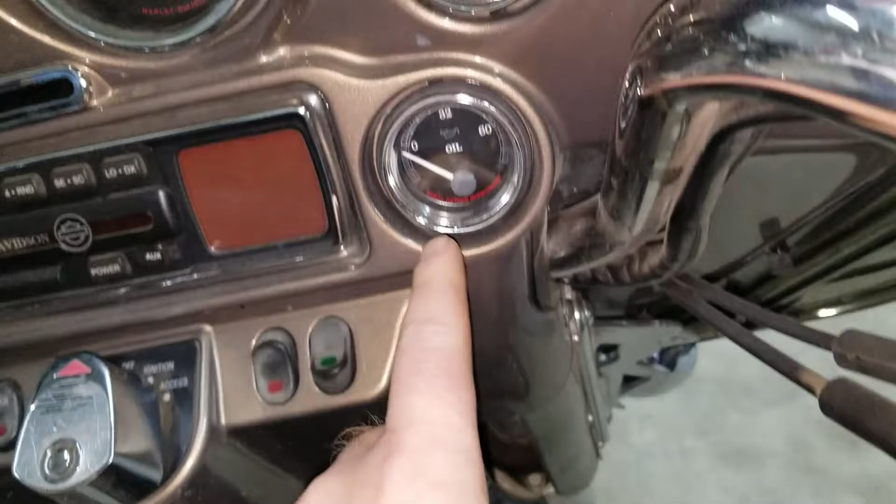Alright, so we got off the lift and we're going to start it up. And when we first had it running before we did all this here, it had like a little bit over 32 pounds of pressure. We didn't have that on footage yet, but I think I got some footage of it, we might be able to put it at the end of this video. We'll see. Otherwise, we're going to start this up and see what it sounds like and see what kind of oil pressure we got.

So on closing here, I guess, we revved it up a lot at the end there, and it ended up going up to about 60 pounds of pressure. And this kit in general was a little bit more difficult than the 07 and later bikes. We could easily see that difference between that video and this video. But it turned out really well, I think we accomplished a nice improvement on this bike, and it needed some new stuff anyways, since it had 100,000 miles on it now. So anyway, hope you enjoyed everything, and we'll see you again soon.